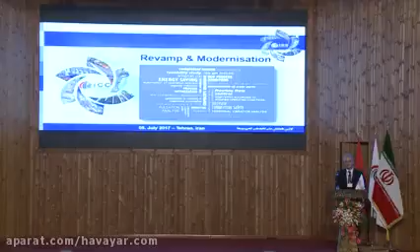I will give you a presentation of revamp and modernization of reciprocating compressors. Let me introduce myself. My name is Andreas Hahn. I'm working for the NEA Group, since 28 years now with the company, and head of department for revamp and modernization since 2001.

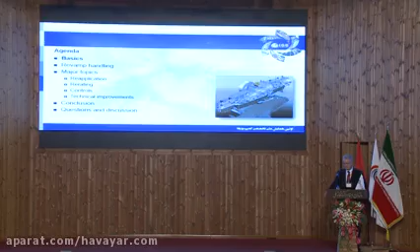Today I would like to show you some details, basics of the product revamp and modernization, and I will inform you how we handle that product revamp. We'll give you some major topics for that product, like reapplication, re-rating, talk about controls, show you technical improvements. At the end, we will summarize in a conclusion, and you are free to have questions or for a discussion later on.

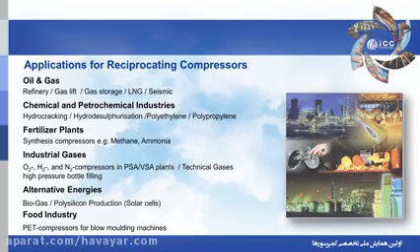The reciprocating compressors you find in several applications, mostly for the oil and gas production, but also for chemical, petrochemical industries, as well as for fertilizers, industrial gases. We are dealing on alternative energy market for biogas, also on the polysilicon market to prepare solar cells. Last but not least, also in the food industry or air compress industry.

To give you a short introduction into the thematic of revamp and modernization, we face the situation on the market that operating processes are changing, and because of that changing, there are requirements for adaptation of the compressor, or at least technical improvements of the compressor. Here that product, revamp and modernization, is used to adapt the existing well-known compressor that you are dealing with and the compressor equipment, even for changed process data or for new technologies without buying completely new equipment.

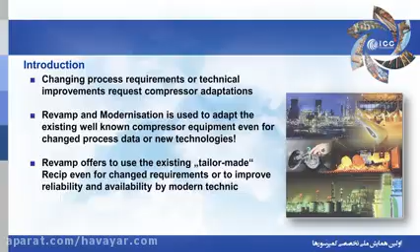Revamp offers here to use the typically tailor-made reciprocating compressor for even change requirements or to improve the reliability and availability according to your situation on site.

When do we talk about revamp? What kind of project is a revamp? I would like to give you a short definition for that. We say any modification on reciprocating compressors that requires a change of documentation - this means for us we're talking about a revamp.

The other thing is repair or spare part, where we replace parts one by one. But for a revamp we have to change the documents, and so this is the signal that we are going for modification.

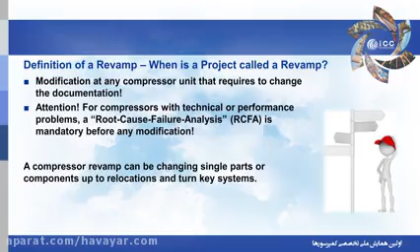I have to give a strong attention here at that point. It is necessary that the compressor is without any performance problems or technical defects. This must be clarified before in form of a root cause analysis to verify what is the problem with the machine. Otherwise, we cannot improve into the right direction.

At the end, a compressor revamp can be changing single parts or components of the machine. It goes up to relocation, so it can be a complete new turnkey system in the end, when we are just using the driving mechanism, for example.

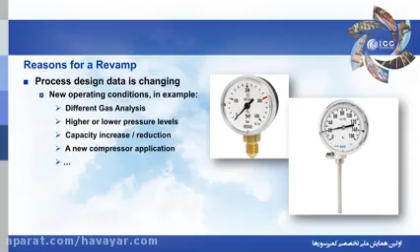There are certain reasons for revamp. Mostly it's the process design data that is changing. We have here new operating conditions, for example, having new gas analyses, would like to change the pressure levels to higher or lower levels. Capacity increase or even capacity reduction sometimes is the point. And also a complete new compressor application might be possible with the revamping of it.

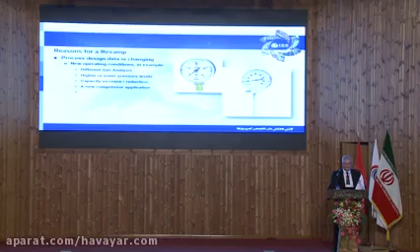The other big reason to do a revamp, these are technical modifications. We heard a lot about that today, improving reliability and availability of the machines. We have a strong research and development group. Even the reciprocating compressor is developed in technic further on. So nowadays there are new components according to the technical state of the art that we can offer. We can offer compressor upgrades, reinforcements, for example, and change the machine for safe and easy maintenance procedures or to increase the lifetime.

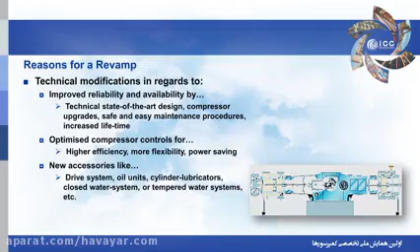Another reason, technical reason, often asked for is the optimized compressor control. Nowadays there are new systems on the market, I will come later to that point, that show higher efficiency, give more flexibility, and in the end also power saving.

New accessories sometimes are also the reason to do a modification when there are no spare parts anymore available for existing oil systems. A new pulsation bottle or better cooler need to be installed. This is also something what is a reason for revamping.

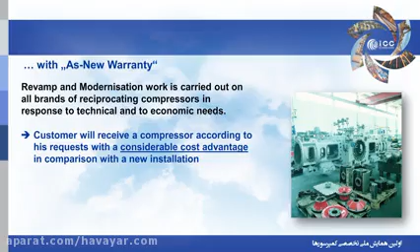At the end, the revamp and modernization work can be carried out on all brands of reciprocating compressors in response to the technical and economical needs of the operators. Normally the advantage for the customer is that he will receive a machine according to his request, but with a considerable cost advantage compared to a complete new installation.

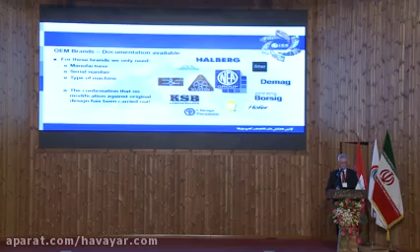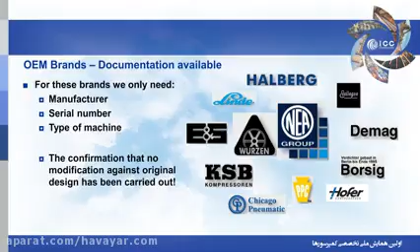We talked about documentation. There are a lot of compressor brands in the market, and Neuman & Esser Group has a lot of licenses, machines, so we are able to calculate also different kinds of reciprocating compressors, not only the Neuman & Esser ones.

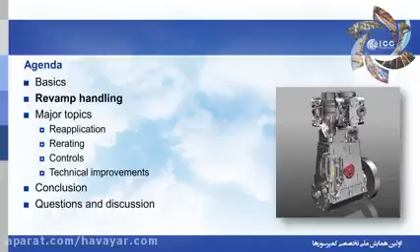Coming to my next chapter, this is revamp handling, how we are doing that. And this we normally do in 2 steps. The first step that we consider is a recalculation of the as-built situation. We have to match with the measured operating conditions of the machine to find out that the compressor is okay. And based on that layout, we go ahead.

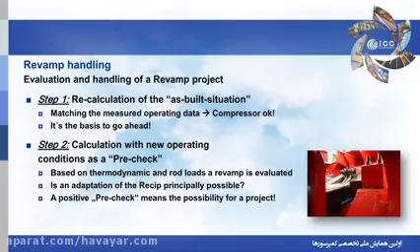In step 2, we do the same calculation again, but based on the new operating conditions. And we are checking the thermodynamic, the rod loads, to evaluate if a compressor revamp in general is possible or not. A positive pre-check of a machine means that there is a possibility to start a revamp project.

In the next step, a detailed verification of the machine becomes necessary. Therefore, we're asking for a feasibility study. With the feasibility study, all compressor details are checked, the layout is prepared for technical improvements and verification by the design group we can do.

And if no documentation anymore available for existing machines, it's also possible to come outside and make a measurement on the belonging part to do a redesign and starting with a revamp.

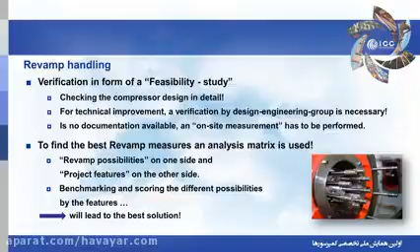To find the best revamp measure, we are using an analysis matrix. We put different technical possibilities for the revamp on one side and compare it with project features like costs, like safety, efficiency, and by a special benchmarking and scoring of these different possibilities and features, we will find the best solution for the modification.

We do that with an own software that we have developed to do the layout for the machines. We call it the KO3 software.

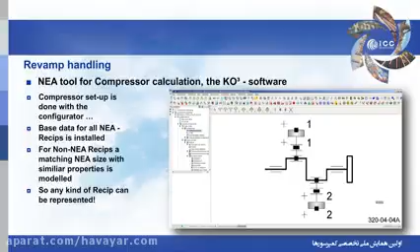With that software, first of all, the compressor setup needs to be done. We can arrange for horizontal, for vertical machines from 1 up to 6 cranks, double acting cylinders, single acting cylinders, whatever you want. For the existing Neuman and Esser machines, there are all base data included in the software.

For the calculation of other brands, we're looking for a similar NEA machine and model it in that way that we also can calculate a complete different reciprocating compressor according to that. So by that way, any kind of reciprocating compressor can be represented.

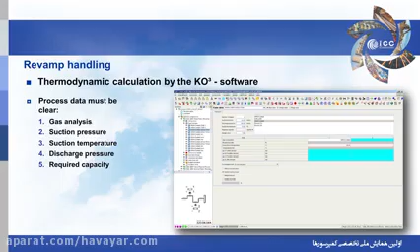Thermodynamic calculation of the software is necessary for the product, and there we need the input from the customer, and I call it the magic 5 informations that we need there. The gas analysis, there must be clear suction pressure, suction temperature, the discharge pressure, and the required capacity. According to this 5 information, we are able to run the thermodynamic layout and configure a machine.

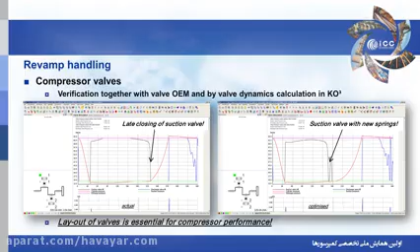What is essential for the machine? These are the compressor valves. We heard in the presentation this morning that the compressor valves are very sensitive and are the most incident for compressor failures. So together with the OEM, we calculate the valve dynamics and do the layout for the best compressor design. The valves are essential for the performance, as I said.

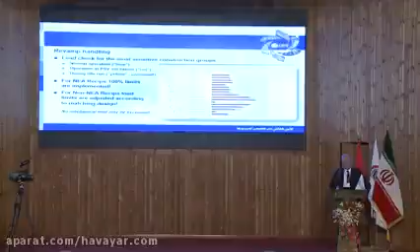When we have confirmed the valves with the OEM, in the next step, we are doing a load check for the most sensitive construction groups of the compressor. There are, for example, the piston rod neck, there is a con rod, there is a crosshead that need to be verified. We are checking the loads for all the operating cases.

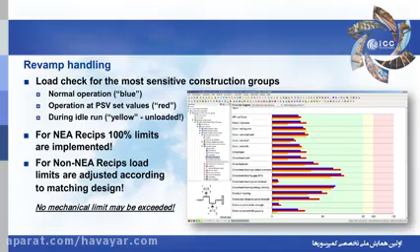For the normal operation, this is the blue bar that you find. We do it for the PSV set pressure, the red bar, and also for the idle run situation, because any recip needs to be started. For the NEA machines, again, the 100% limits are implemented. For the non-NEA recips, we adjust the allowable loads according to the data of the OEM. In the end, no mechanical limit may be exceeded.

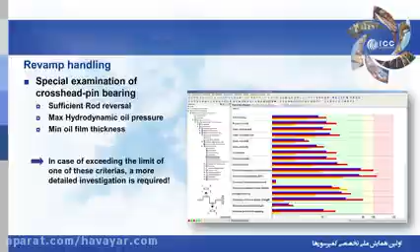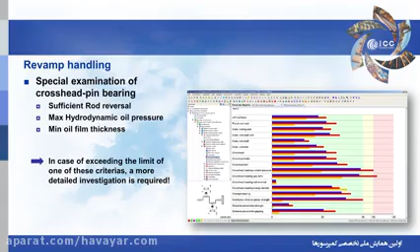Special examination is needed for the crosshead pin bearing, because there we don't have only one value that we have to compare. You see the red bars entering the 100% mark. But for the crosshead pin bearing, besides sufficient rod reversal, the maximum hydrodynamic oil pressure may not be exceeded, and the minimum oil film thickness must be there. The combination of everything shows if the bearing is possible to use or not. In case of exceeding that limit, we have another tool that we can use to verify that.

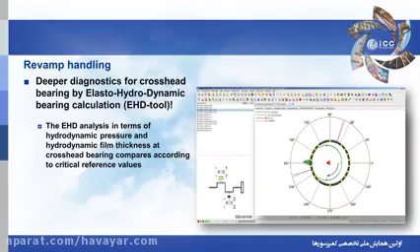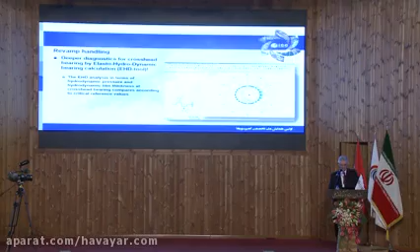That's the elastohydrodynamic bearing calculation. By that tool, we are able to calculate the oil pressure, the oil film thickness, and can evaluate if the compressor can be further used or not for the modification.

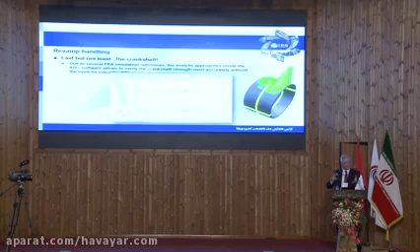Last but not least, the crankshaft has to be checked due to several FEA simulation references that we did. The analytics inside our software approaches allows us to verify the crankshaft strength most accurately. We can describe a bending line of the crankshaft, and with the weight of the flywheel, we also can check the main bearings regarding the pressure on the edge of the bearing, if it is useful or possible to install it or not.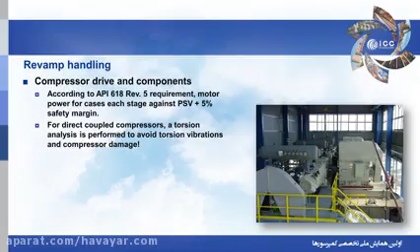When we are upgrading a machine, when we are changing parameters, also for sure the power, the drive components need to be checked. This we do by torsional analysis, what we run separately from our KO3.

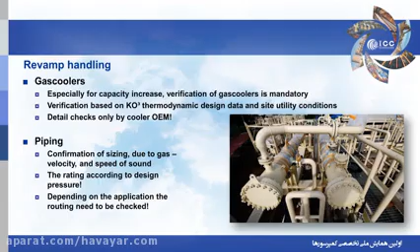And according to the new power, also the gas coolers especially need to be checked for increased capacities. Verification is mandatory, done according to the data that we give to the OEM, and he does the detailed check on the vessels, on the coolers. Piping needs to be confirmed, that sizing, the rating must be okay for the new conditions. And depending on the application, when we change vessels, when we change coolers, sometimes the routing needs to be modified by doing a new general arrangement and isometrics coming from that.

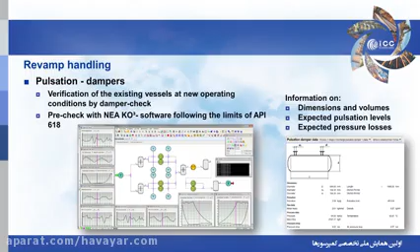The pulsation dampers also need to be verified. Here we have a tool inside our KO3 to make a preliminary damper check, to compare the existing values with the required ones. What we find as a result of that calculation, we get a recommendation for dimensions and volumes, expected pulsation levels, and expected pressure losses.

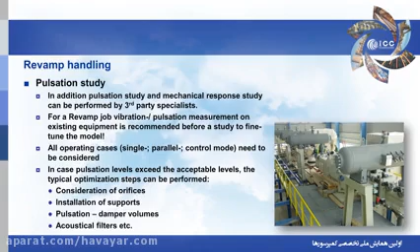In the end, if it is not sufficient, we also deal together with third-party specialists for acoustical pulsation studies as well as mechanical response studies. For revamp, we always have the advantage that there is already a unit existing where we can do measurements and match the existing arrangement to the model for the calculation, to get a better result for the pulsation study in the end.

In case pulsation levels are exceeded, we go stepwise forward. The first instance is considering orifices to be installed to reduce pulsations, installing additional supports, or if this doesn't help, we install new pulsation dampers, bigger volumes, or also acoustical filters can be used.

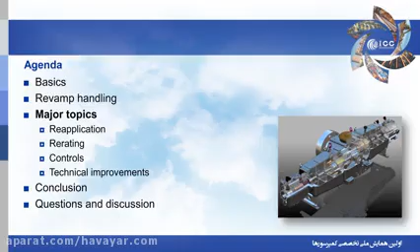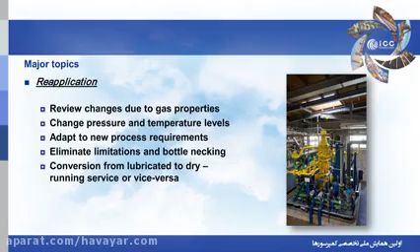Coming to the major topics, these are the frequently asked questions coming from the customer. For reapplication, there is a typical review of changes due to gas properties that are changing, change in pressure and temperature levels. We have to adapt to new requirements, eliminate limitations and bottlenecking, or conversion from lubricated to dry running or vice versa.

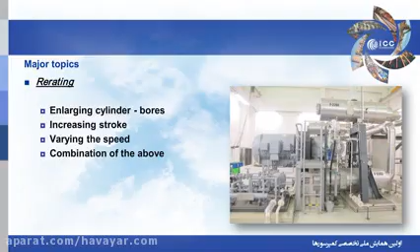For re-rating, there we have the chance to enlarge the existing cylinder bores according to the limits of the compressor from the loading, increasing the stroke, varying the speed, or a combination of all of that. The best solution is found in the feasibility study that we run.

Yeah, thank you so much.

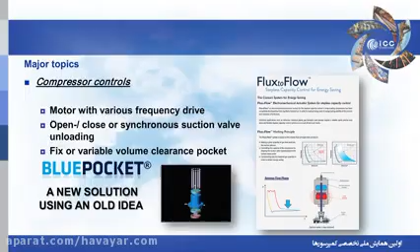Old idea, new technology: it is a clearance pocket control. You see here on the head end side of that double-acting cylinder a clearance pocket, but the special thing is that we have a poppet valve in between the clearance and the compression chamber.

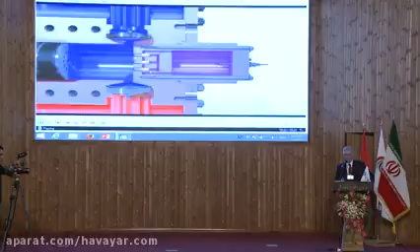The poppets of the valves are controlled by a special control pressure, so the clearance pocket is not completely open during all the time of the stroke, but only part-wise. By part-wise opening the clearance pocket, it is possible to influence the PV chart again, to change the gradient of the curves and influence the capacity.

When we put the control pressure, like here, to the maximum discharge pressure, the clearance pocket is totally closed and we have 100% flow of the compressor. On the other hand, when we reduce the control pressure down to the suction pressure, the PV chart becomes a straight line, and so we have 0% capacity on the head end compression end of that cylinder.

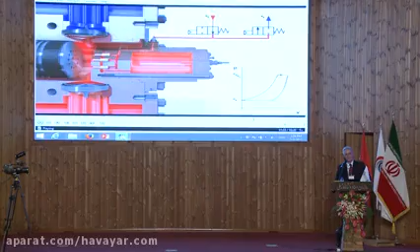According to that, we can regulate the flow of the compressor between 0 and 100%. The control pressure we take from the system itself. We have control valves installed in the suction line of that stage and in the discharge line of that stage, and according to a 4 to 20 milliamp signal coming from the operator, this control pressure can be adjusted.

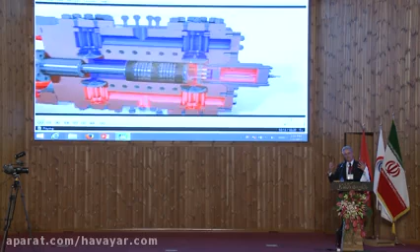So we can vary the flow to the required capacity and have a very nice regulation without any additional components outside the compressor.

Okay, now we go ahead. After compressor controls, the last topic is revamp modernization - this is technical improvement. Here we have the classical points where we look at the compressor: changing the materials of the bearings for longer lifetime, improving the crosshead to piston rod connection for safe operation, various rings and pressure packings according to actual technical standards.

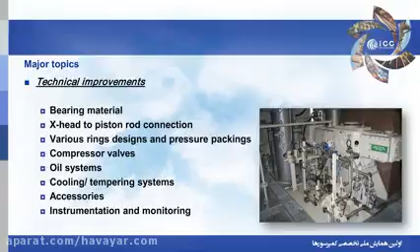Compressor valves need to be checked if there are certain problems with them, and can be optimized according to actual technical designs. Oil systems, cooling water systems, or tempering systems, depending on what is needed. Accessories can be supplied - instrumentation, monitoring - even that can be part of a revamp to improve the compressor performance.

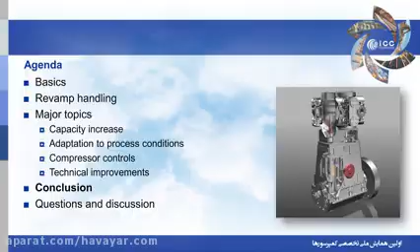Coming to the end of my presentation, to the conclusions, I would like you to keep in mind that revamp in general is a good opportunity to make a compressor fit for new technical specifications and process conditions, as long as the compressor is in good technical shape.

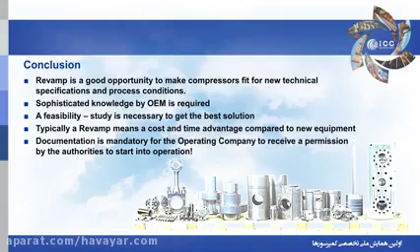Sophisticated knowledge of the OEM you do the revamp together with is required. I showed you certain kinds of checks and verifications that are necessary to have a safe solution afterwards. This is done by ordering a feasibility study. It is a lot of engineering work to come to that safe and good solution for the revamp. In the end, typically a revamp means a cost and time advantage compared to new equipment.

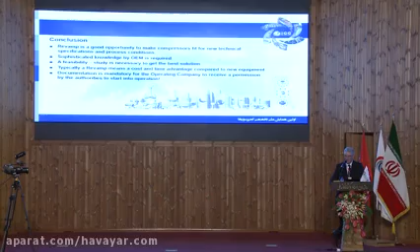Documentation is mandatory for the operating company to receive in the end the permission by the authorities to run that compressor again. So, I'm at the end of my presentation.